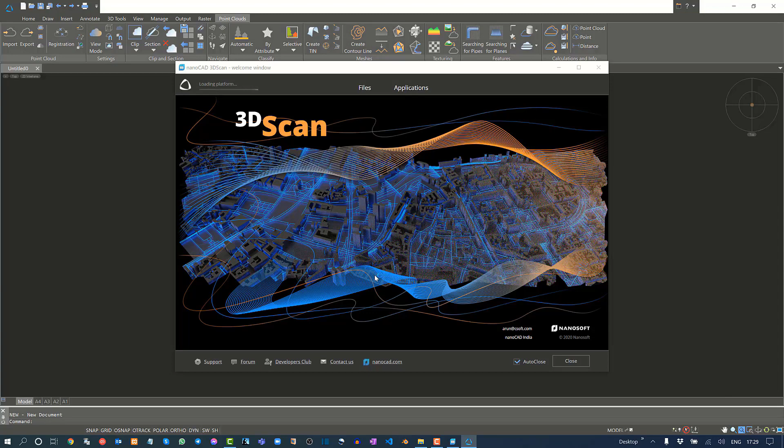Hello everyone, today in this video I'm going to show you how to import LiDAR data in NanoCAD 3D Scan. I'll cover the supported LiDAR data formats, the LiDAR data view mode, and also how to create sections of LiDAR data in NanoCAD 3D Scan.

Let's get started. As you can see on my screen, I have opened NanoCAD 3D Scan. I can go to this dropdown and click about, and now you can see NanoCAD 3D Scan. As you know, NanoCAD is the basic CAD tool, so you have NanoCAD tabs from home to raster - all the tabs, this is the basic NanoCAD.

On top of basic NanoCAD, you have point clouds, the extra menu, and that is for handling LiDAR data. It will help you handle LiDAR data, view it, create sections, create 3D models from point clouds to models, and you can analyze, along with many other functions you can use in NanoCAD 3D Scan.

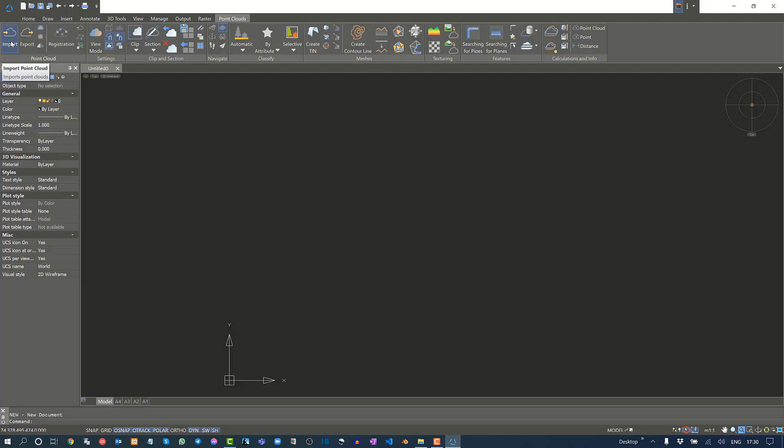In this video, initially we will try to import some LiDAR data. To do that, you should go to import. The moment you click on import, it will ask you to switch the model to 3D render mode because it won't open in 2D render mode.

I should be able to open the LiDAR data in 3D mode in NanoCAD 3D Scan. So I will say yes, and immediately it will ask me to choose the LiDAR data file. In this case, I will choose this file, this one, the last file. But before I proceed next, I would like to show you the supported LiDAR data formats in NanoCAD 3D Scan.

If I click here, now you can see all these formats. Basically LAS is supported everywhere. So LAS is there, BIN, PTX, PTS, PCD, TXT, XYZ, XYB, and finally you have PLY. So this is all you have in NanoCAD 3D Scan.

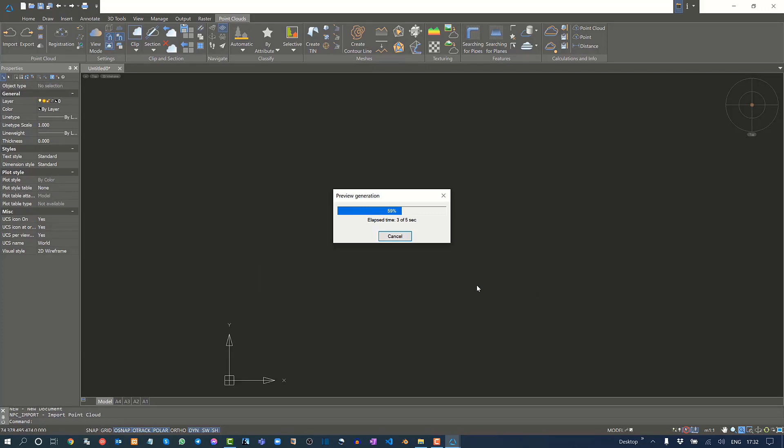In this case, I'm going to use a LAS file. So I will choose the LAS file and then click OK. Now it will generate the preview. Let's wait for a second.

Okay, so now the import dialog box is here, and you have different controls. You can use this control to manipulate how to import and how much of the entire file you would like to import - that can be controlled from the tools. I'm okay, I'm going to import the entire file.

And now you have some statistics - this is about the LAS file. Here you can see the number of points, and you can find the minimum and maximum X, Y, and Z values of the specific point cloud data. So you have the statistics, you can read it here, and then choose the unit. I will keep it default as meter, so I'm okay with this.

Now it says the file has a maximum intensity of this value. And apart from this, you have two tabs with the metadata and the codes. Codes and metadata - these both informations are currently selected all. If you turn this off, you have the option to choose this metadata, and options for how you would like to import point clouds in NanoCAD 3D Scan.

In this case, I'm going to choose all of these options, as well as for the codes. In future videos of NanoCAD 3D Scan, we will discuss this metadata and the codes thoroughly. There are a few more options which I will keep as they are. Then you have spacing - by default it is 1. I can turn these options on and set the number.

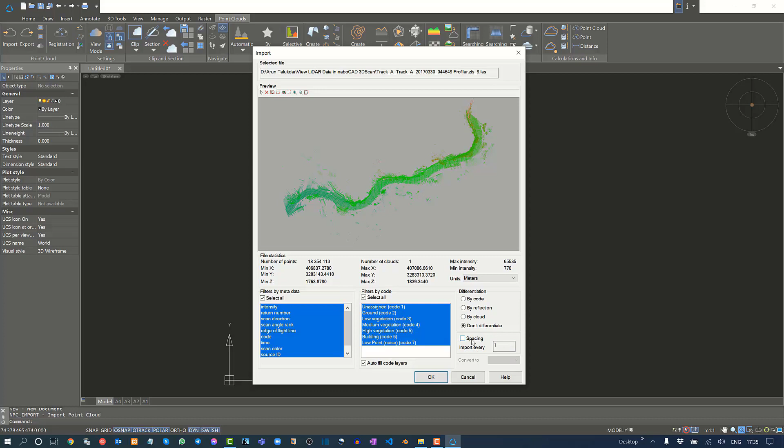I will use the default option and turn this setting off, so I'm ready to import now. The moment I click OK, the import will start and the entire cloud data will be imported in NanoCAD 3D Scan shortly. There you go, now I can see the entire data in NanoCAD 3D Scan.

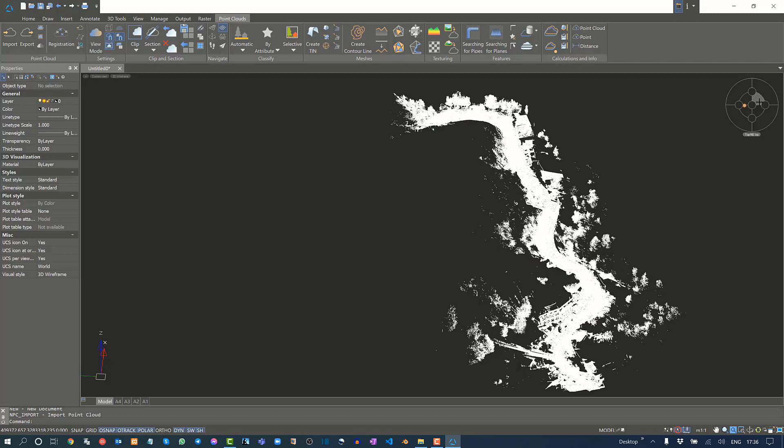I can press Shift and hold the wheel on the mouse to see the model from different angles. You also have this wheel. You can go to top view, side views, or any view you want. From the keyboard, I can hold Shift and hold the wheel on the mouse to rotate the entire model. Now I can zoom in a little bit.

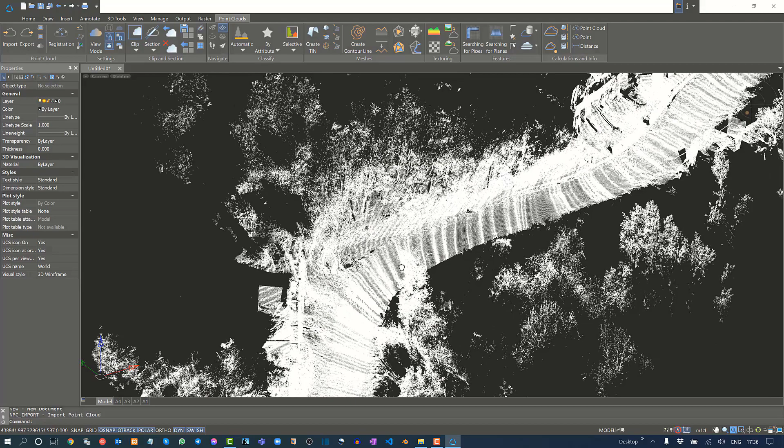So this is the whole information, right? This is hard to read, because if I zoom in on all the points, it's very hard to read. But if I change the view mode, how can we do that?

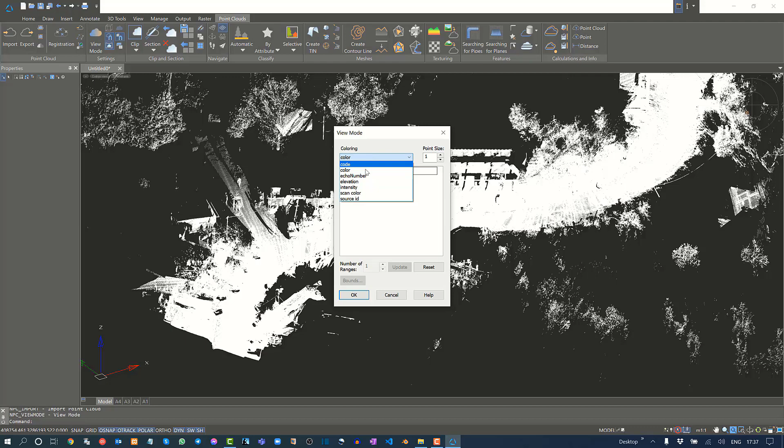We should click on view mode, and now we can control the viewing in terms of color, echo number, elevation, intensity, scan color, source ID, etc. In this case, I'm going to use elevation, and I'm okay with the default settings, so I will say OK.

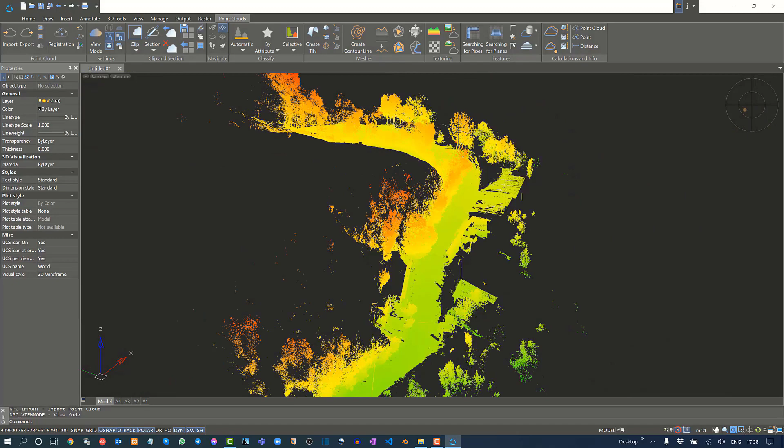Now the entire model will be rendered, so I should be able to read it much better. Yes, here - you can see a different color for the greens and other portions. These are the trees you can see, so it makes a difference. If you have points at different elevations, it will definitely make an impact by showing color at different elevations, right?

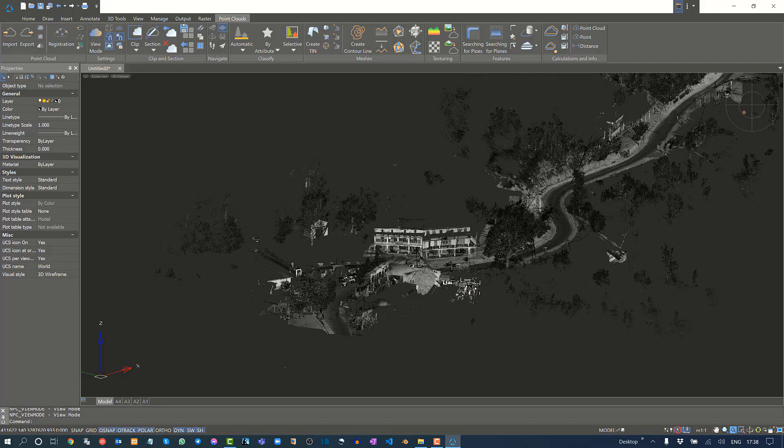Then I will change the view mode again, and I would like to use intensity mode, and click OK. Now this is very good - I can see things more clearly. Now I see there's a building and a road, another building nearby. This is very good, it makes sense and I can read the data clearly here, right?

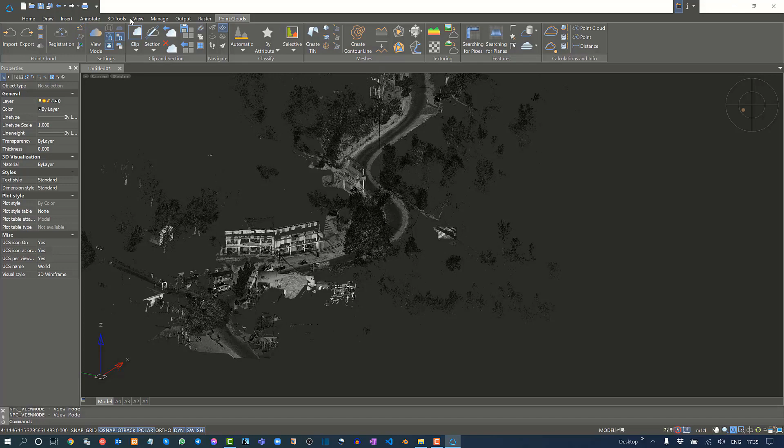So I will keep it in intensity mode, and now I would like to create some sections. To do that, I will go to this view and create one more vertical view. So this is two different vertical views, and now I would like to create a section. Maybe I can cut from this section, maybe from here.

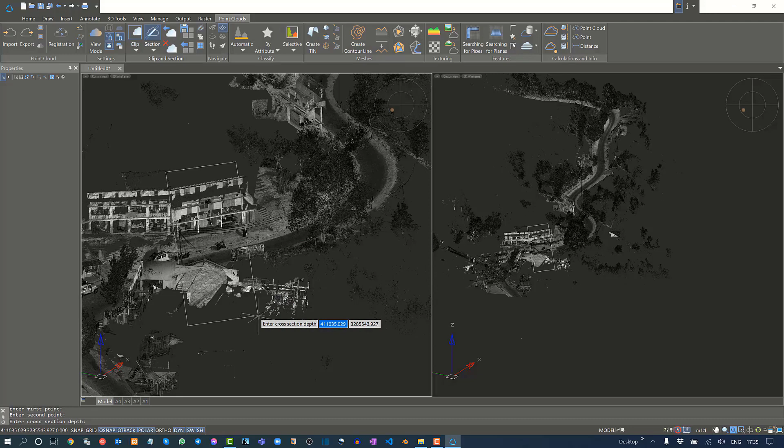There's a building here, so I'll go to Point Clouds, then Section, and use one of the section tools. Maybe I can cut the building from here up to this portion, and then click here. Now I can see the view here - this is the sectional view.

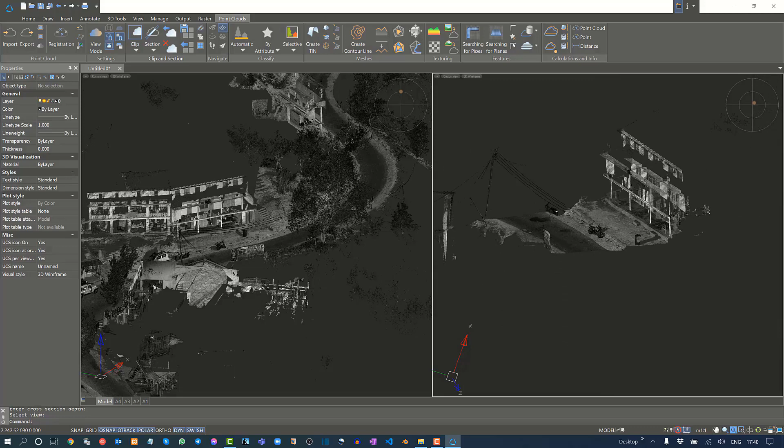I can rotate it, zoom in, and get close to the building and the road. I'll zoom in, so now I can see the sectional view. This is a sectional view, since I cut the data here. I can set the preview I need and view it from this window, right?

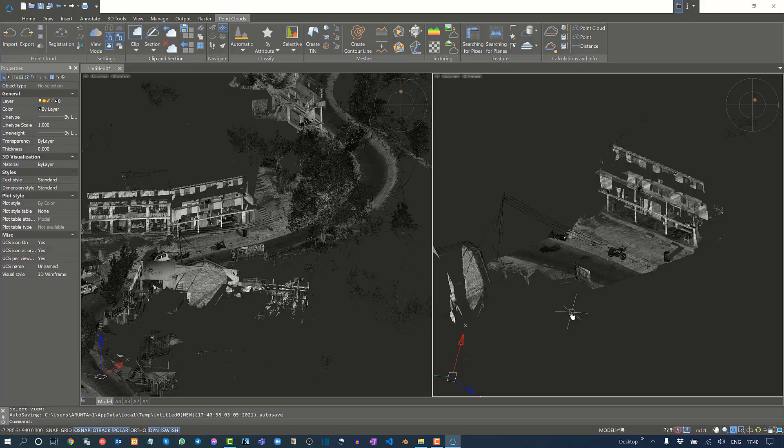So that's all in this video - how to import data and the file formats supported for LiDAR data, the view modes, and how to create a simple section in point cloud data. In future videos, we will discuss more about point clouds, how to use the point cloud data, and run some complex analysis. That's all for today, see you next time.